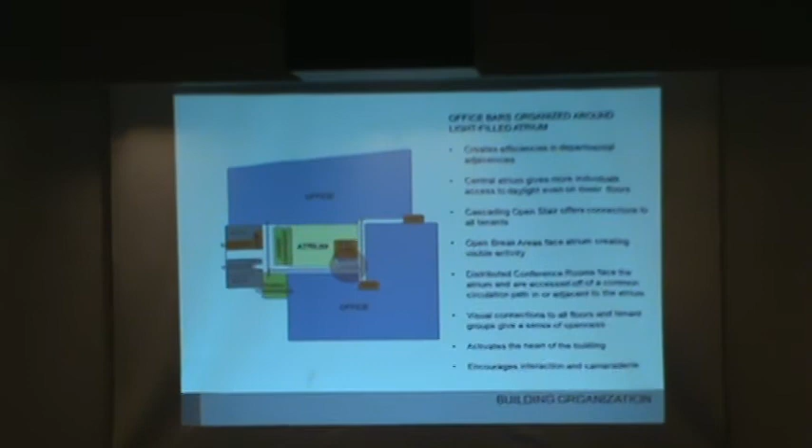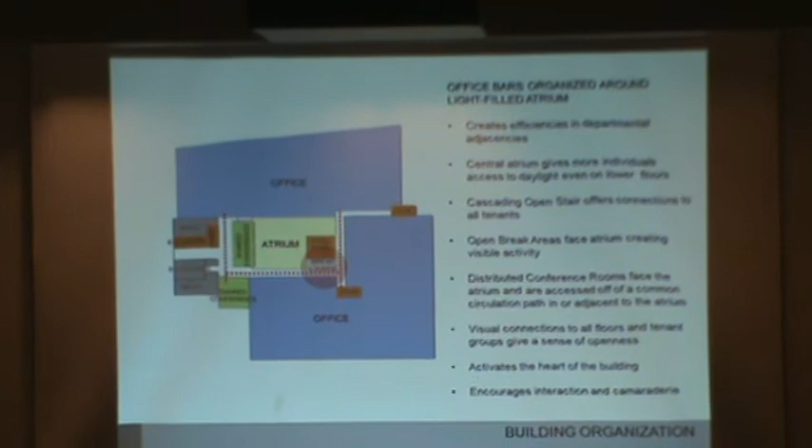We were given an extensive program. It was about 212,000 square feet with 3 different departments, mostly Washington State Patrol, Office of Financial Management, and legislative agencies. We knew right away we were going to have to carve away at this building, cut a hole in it to really create a dynamic workplace. By dynamic, we mean not only does this have a wow factor, like this is a fun place to come and work, but dynamic in that it's changing, it's flexible, it can adapt over time.

So what we've done here, you can see the basic building diagram. We have 2 bars of office indicated in blue. We carved away the middle of the building and put an atrium. The atrium not only brings light into the building, but it becomes a social hub for the building. You can see the red dashed lines here are the open walkways into the atrium. What we really did was take those common elements of the building and push them to the center of the building. All these elements are conference rooms.

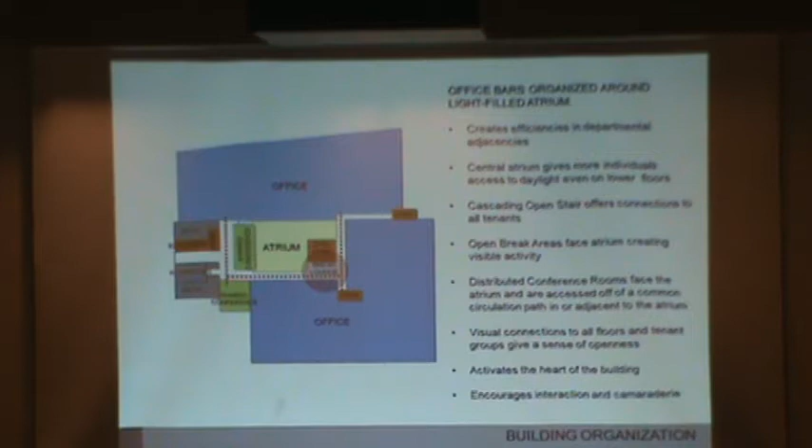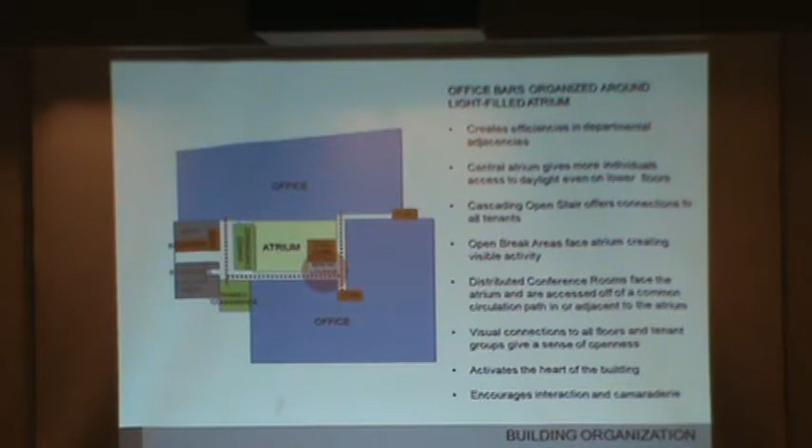We moved the lounge area into the space. Humans by nature are very social. The way we work today is much different than it was 20 years ago. So people are more social, have more meetings throughout the day. So what we've done is taken all of these common spaces and pushed those into the middle of the building. The result, of course, is that we make it a very interactive space, filled with light and activity, to increase and benefit the quality of life of the people living in that space.

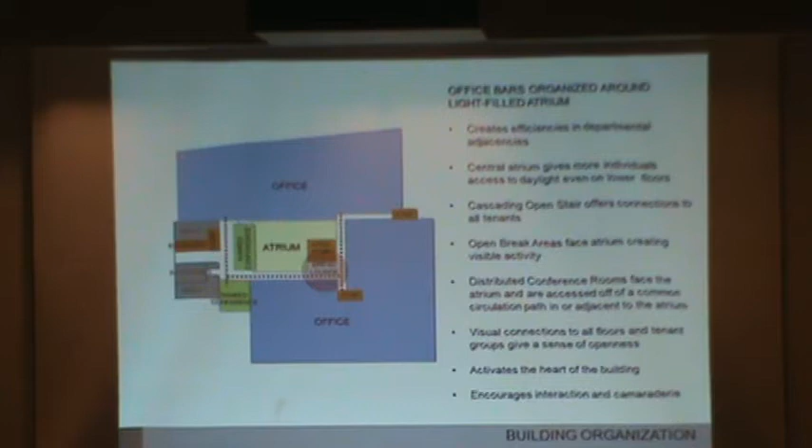Typically, a full block building, which this is, you end up with everybody fighting over, I want that window seat. What the atrium space does is really bring natural daylight into the space and make it a much better quality workspace for the majority of the building.

We're going to kind of stack through the building. This is the lower level. This building is actually kind of 5 stories on the north side. You can see what we've done here is the program for the lower level is mostly Washington State Patrol. There's 3 different departments down there. We have a secondary secure entrance to the building along Union Avenue there.

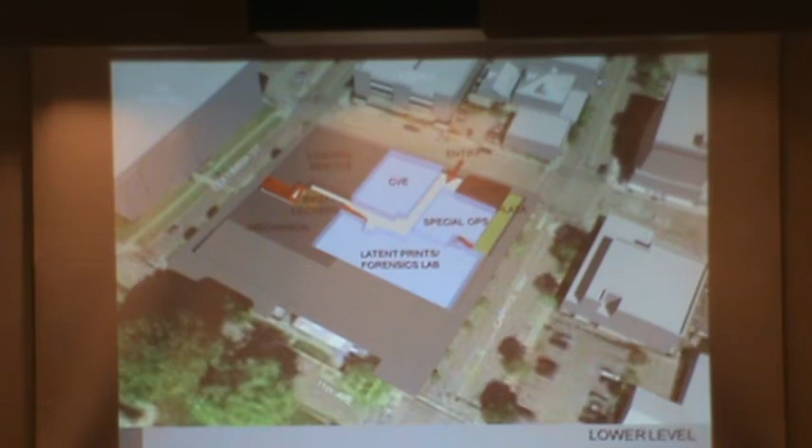Partly because people are going to be parking around on all sides of the building, but also to gesture back towards the city. We've also indicated a retail area. It may not be retail, but it's an opportunity to contribute back to Capitol Way. We also thought that could be a space for something like a tribute to fallen Washington State Patrol. But it's a flex space and opportunity to really have a front on the city. We'll talk a little bit about that when we get into the integration of the building into the site and how it relates to the city itself.

Moving up through the building, this is the primary level of the building. You can see on the southwest corner, facing the campus quad, we have our main entrance. The entrance is set back on 2 different sides. It's a double height entrance space leading directly into the lobby space. There's a security desk at this location, and connected to that is the first floor of the atrium. That's really meant to connect the outside and the inside.

Very welcoming space. The atrium would be filled with tables and chairs and stuff of that sort. We've actually also cut a hole in the atrium at that level, so the atrium actually connects all 5 floors of the building. If you do enter on that lower level, come up through the stairs, you would be in the center of the building.

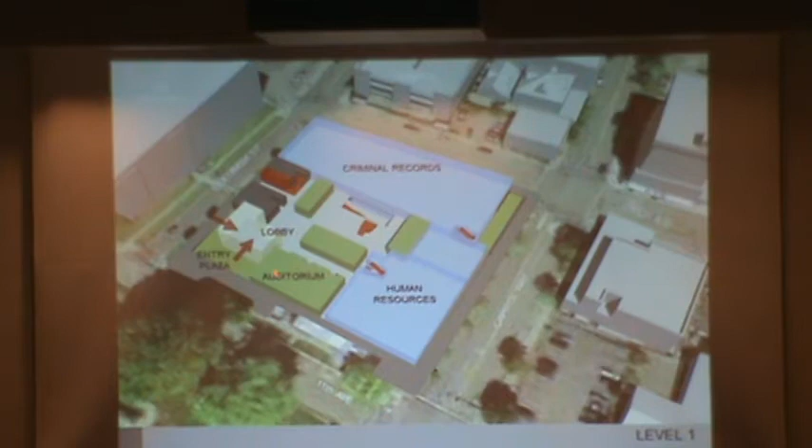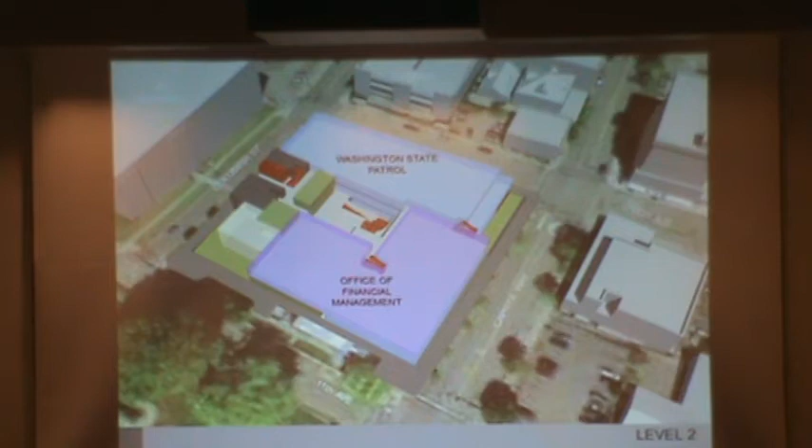Washington State Patrol has the criminal records and human resources departments on that level. The green areas are the common conference rooms for the building. Moving up the building, there's the Office of Financial Management, which is in the purple area here, and the Washington State Patrol areas. You can see the green areas are, again, those shared conference rooms. The idea was bringing all of those common spaces into a very central location in that heart, that hub of the building in the atrium.

Stacking up to the 3rd floor, you might notice that the atrium is actually getting wider as it goes up. That allows more daylight to come in, more access to it, but it also allows those open walkways facing out into the atrium to actually be connected to one another. You could look down and see people moving. The orange is vertical circulation.

We have an open stair connecting all of those floors, and at the tops and bottoms of the stairs is the open lounge area, which is basically a break area. What that does is really help connect all these departments and really become that social hub, that living room of the building.

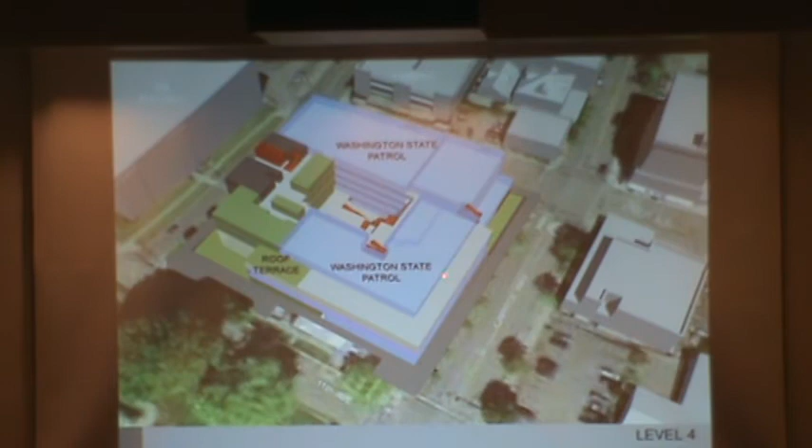Moving up to the 4th floor is all Washington State Patrol groups. I think there's 5 or 6 up here.

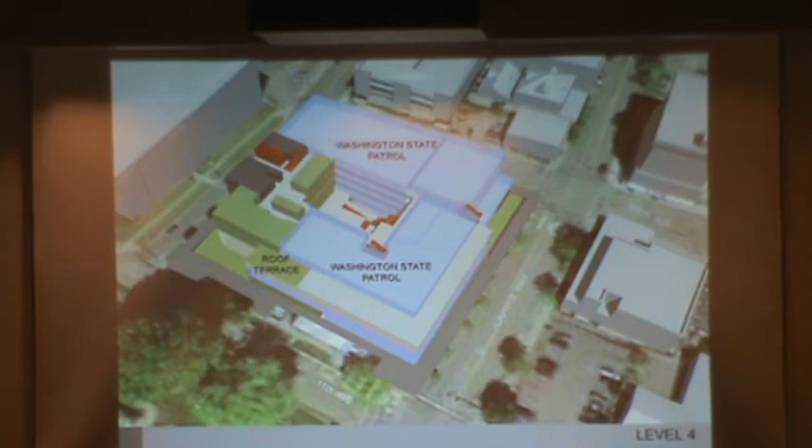We've actually set the building back on the south and east faces to create a roof terrace. This terrace looks back over the campus quad. It's south facing, so those 3 good months of weather we get here make it a nice space. The break area shifts from the atrium space to be on that roof terrace, so it is a common amenity for all 800 tenants. The roof actually projects over that roof deck area, so in those 9 months of rain like we get today, it will still be a usable space.

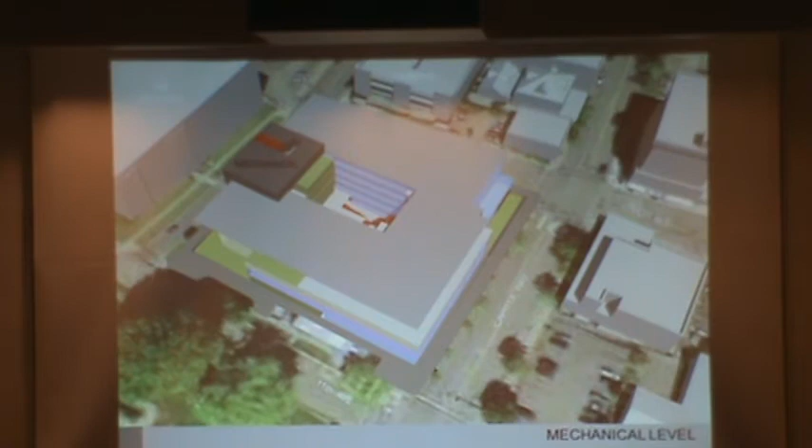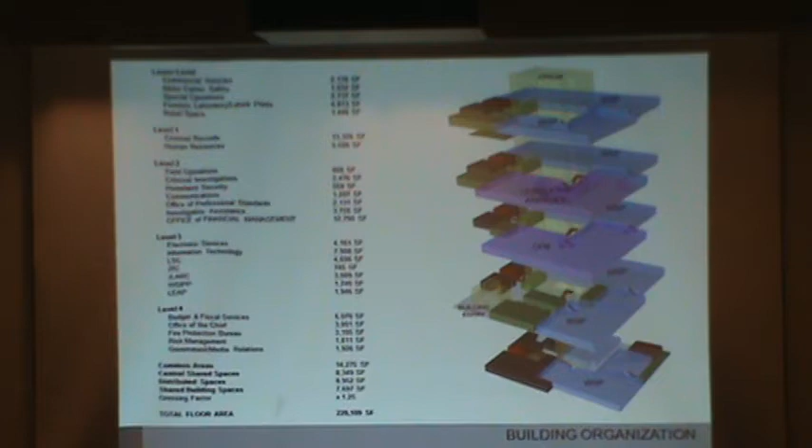We also worked really hard with McKinstry, the mechanical engineer on the team, to reduce how much rooftop mechanical we have. We wanted to use that as an opportunity to add PV to the project, a renewable energy source. You can see in the diagram on the right how the building stacks up, and the yellow area is the atrium. You can see how that connects all these departments, really becoming the living room and hub, the focal point of the building.

In addition to those spaces you saw in the atrium, I wanted to talk about the different types of interaction spaces throughout the building. Within the tenant spaces, we've held some areas off the windows to create wide spots in the corridor where people can get up from the desk. People meet a lot differently than they did 20 years ago in an office building.

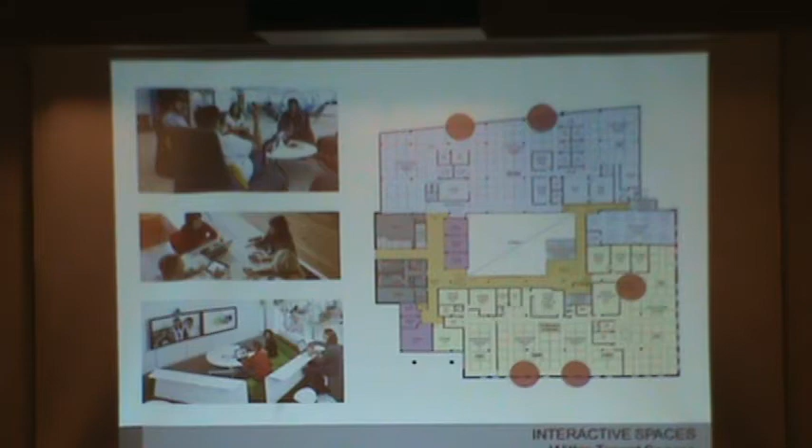It may just be person to person, or person to a team. We're creating a variety of these spaces. You can see here all the spaces available for the different tenants within the building, again pushed to that atrium space.

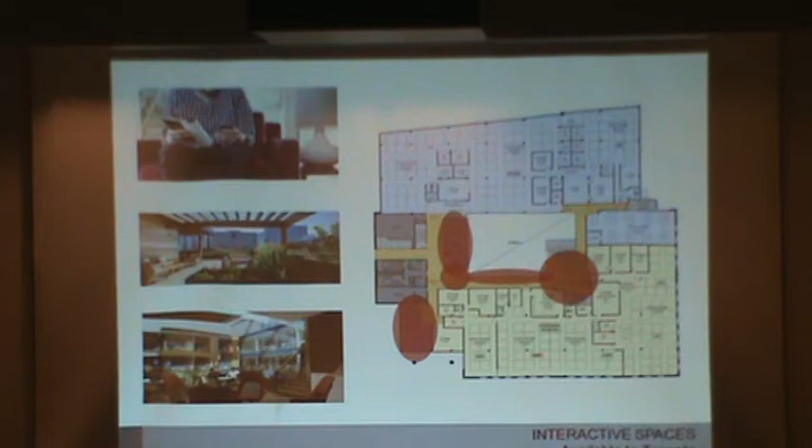The break area and lounge have wide spots in the corridor with a couple pairs of chairs and some tables, as well as pushing the conference rooms out there. These are available to all the tenants.

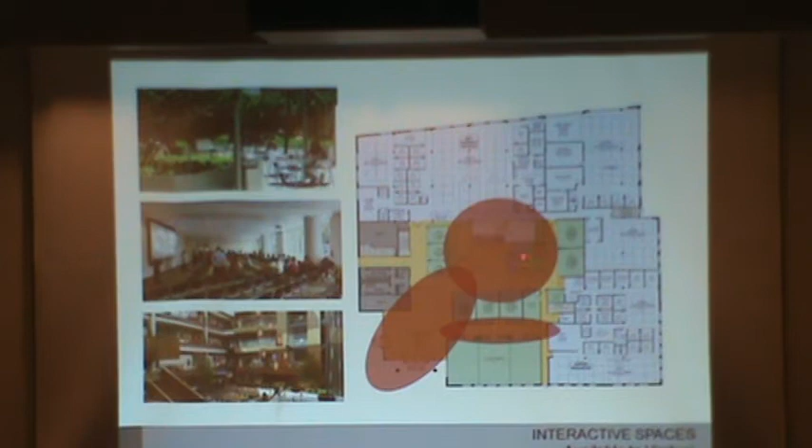The large area here is the main entrance to the building, with the security desk located here so security has visibility to anybody entering the building, and also to the foyer outside the auditorium space. The intent is that the atrium floor is available to everybody - you would check in and go through security.

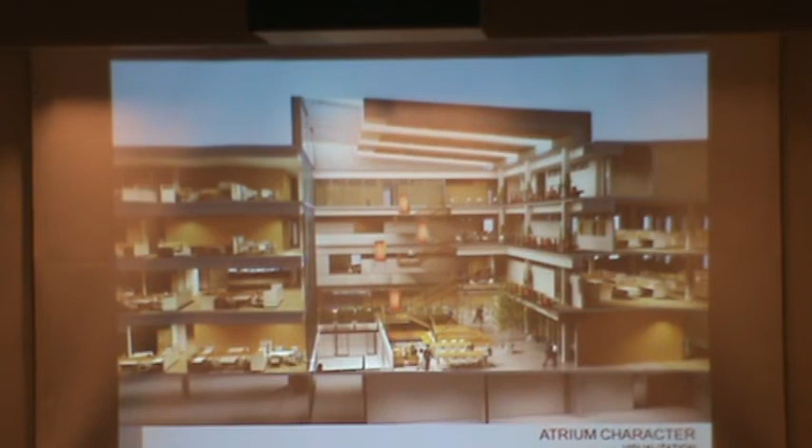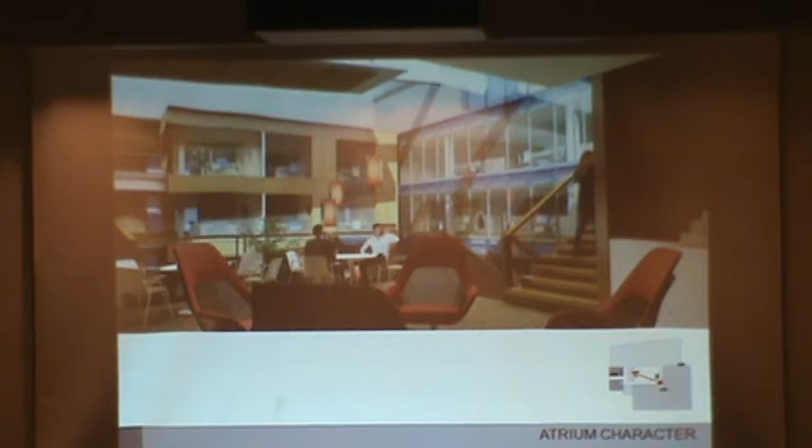This is a view from, I believe, the third floor open lounge. You can see the connecting stair going up to the fourth and down to the second, with lounge tables and informal meeting spaces. I thought it was very important that as those stairs cascade down, each of the landings is actually a wide collaborative area for meetings, so that flow of traffic and activity continues through the collaborative spaces and projects into the atrium space - so you're in that space.

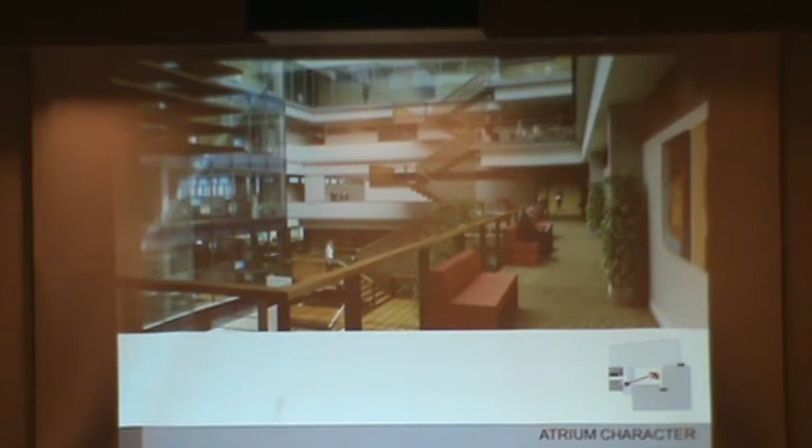You can see off to the left the cluster conference rooms that stack on every floor, easy to get to. Another view of the atrium space, looking back at those conference rooms - there are 3 on each floor, stacking all 4 floors.

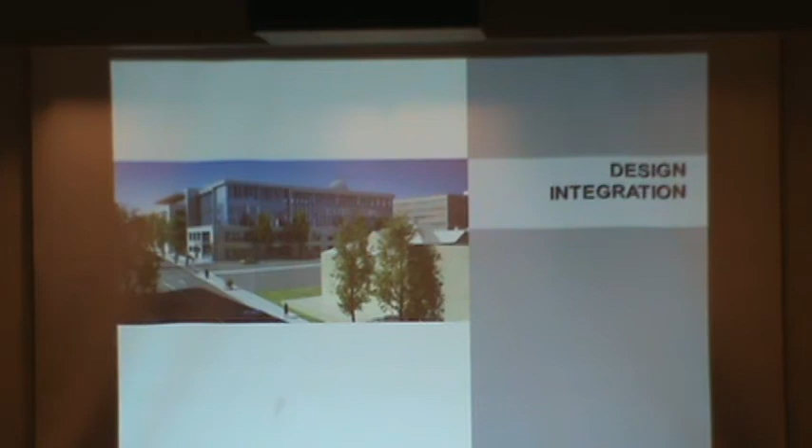We're going to talk a little bit about how this building fits into the context. As you know, our site is located at the edge of the historic campus, and it is facing downtown to the north. So the challenge is how do you create a building that works in the transition between two very different qualities and contexts - the very formal campus and the very informal city of Olympia.

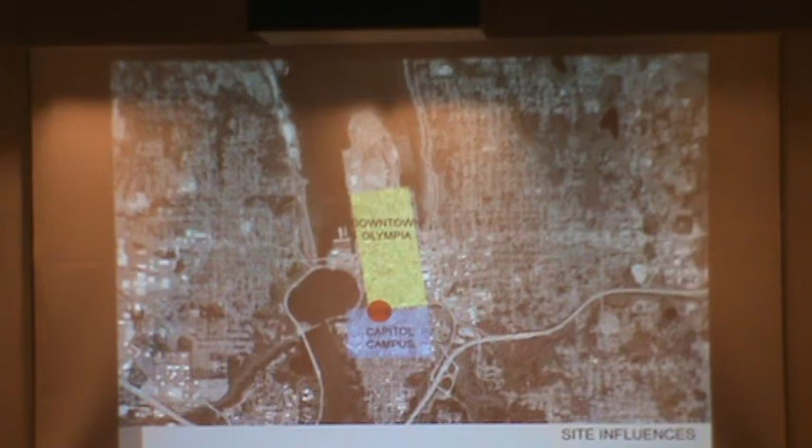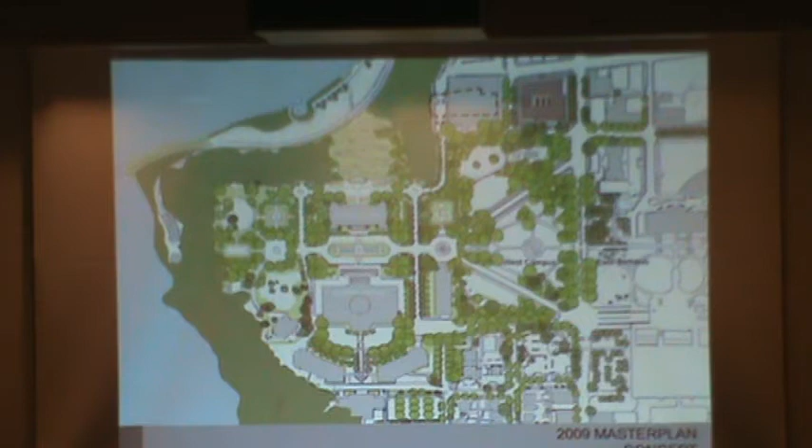So let's talk a little bit about integration into the site. What you see here is not what you see on campus now. This drawing is of the 2009 master plan for reintegrating the original Olmsted plan for the historic campus, and hopefully within the next couple of years that's going to be implemented. For our design, this is really what we needed to integrate into so our project would become part of the whole composition of the campus.

Part of the significant parts of the Olmsted plan are the surrounding street trees, which we are on that periphery, so those street trees would be continued around our building.

The other significant point of the Olmsted plan is that as you transition through the varying landscape elements - the surrounding street trees, the naturalistic outer campus area, and the more formal gardens around the buildings themselves - you have a series of very important transitional nodes. We've included that in our design too.

You can see the open public space at the southwest corner. That creates another transitional node as you come off the circulation path that's already there as part of the Olmsted plan, creating a transition point either between our building or hopefully whatever happens on the GA side, closing that loop as you exit the campus.

We've also added a secondary node at the city side. We talked earlier about the possibility of either retail space or a public interactive space at that corner. So that node at the corner of Union and Capitol Way would act as a transitional node as well. It all connects into the overall Olmsted master plan.

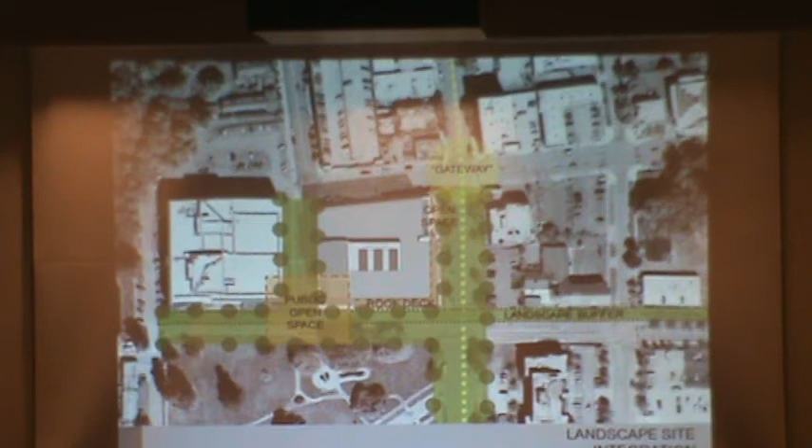Next slide. Landscape - you can see how the street trees are surrounding the building, and how in the southwest corner the transitory node focuses direction into the building from the circulation path. That will be strengthened through landscape elements such as stone benches and natural materials used throughout, connecting back to the home campus.

You can see in the landscape plan we go from a very large space to the open public plaza where our entrance is recessed. You can enter on two sides, go through a compression zone where the security desk is, and then pop back up into this 4-story meeting space.

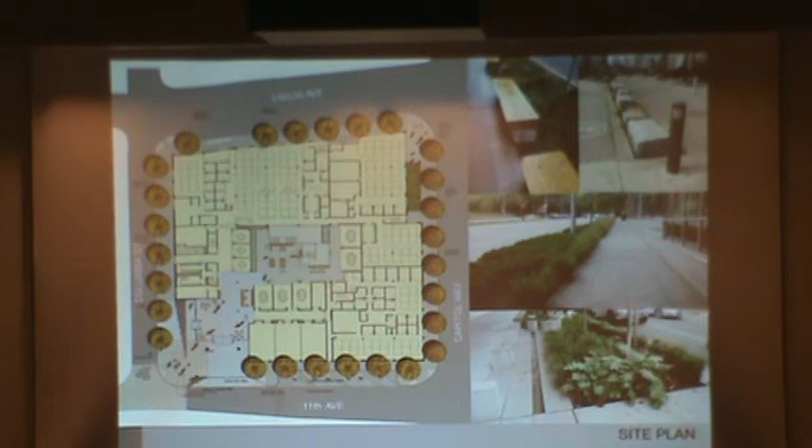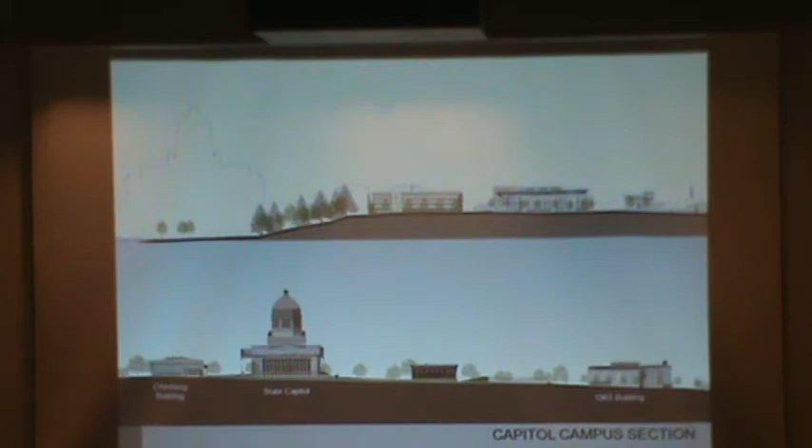Here you can see a couple of sections cut through the campus. You can see the scale of our building relative to the GA building at the top. Again, we're holding to that 59-foot height limit imposed on us, which really sets the datum for the supporting buildings of the campus. You can see in the bottom slide, the state capitol dome is in no way challenged by the height of our 59-foot building on the lower right.

Again, that formal limestone facade wraps around the building at the 3-story level, but then drops down as you get toward the city in relation to the 2-story buildings that surround the building on the Olympia side. It's really a transitional facade - you're changing the scale of Capitol Way.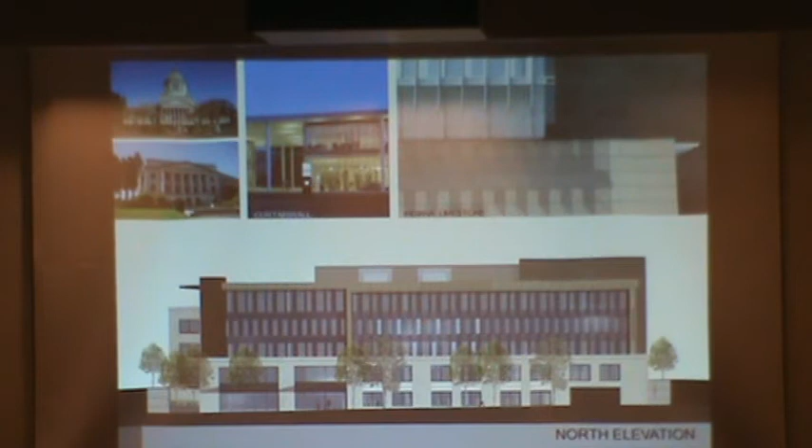As you move to the north side, we get a little bit more playful. We have a glass curtain wall system that gets more playful in the patterning. The scale changes, but we still maintain that stone base throughout the building, so as you walk around you still have that same sense of quality material of the stone of the campus. The building then steps back at the upper levels, really trying to reduce that wall between the city and the campus.

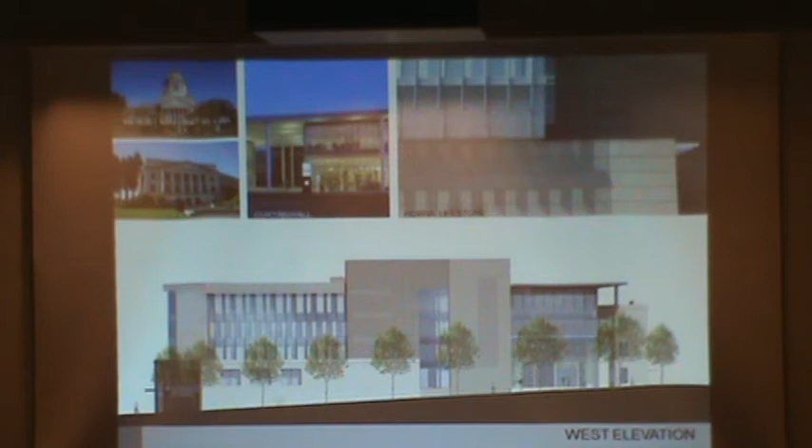The west elevation, you can again see how that's transitioning back. You can see the entrance to the building on that southwest corner. We've placed the building core, which is the mechanical rooms and elevators, things that don't have as much need for glazing. We're really using the building elements to help with the performance of the building. This side of the building gets a lot of afternoon sun, and by putting these elements here, we don't have to cool the building quite as much.

View from the north side, looking up Capitol Way. You can see the building with the dome in the background. You see that curtain wall system above, stepping back, becoming a much more lighter and transparent system.

Entrance to the building as seen from the campus quad. You see clearly defined entrance with the columns there. We have an animation for you, to give you a fly through of what the building looks like, and we're going to fly you into the atrium to give a sense of what that is as well. So this is heading north at Capitol Way.

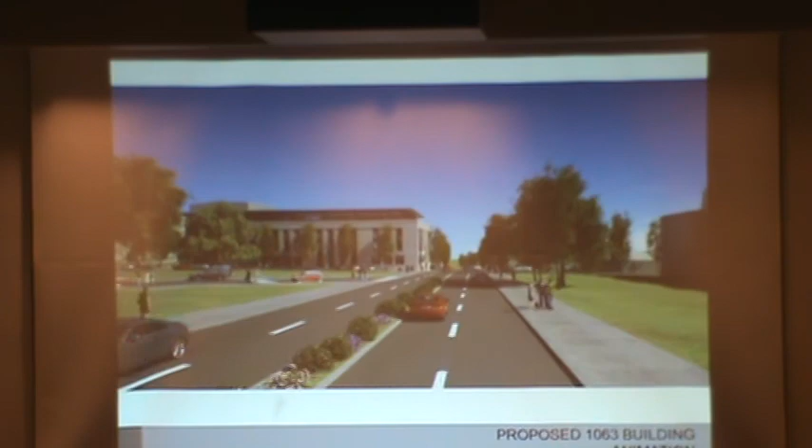Spinning around, you can see how the scale of the building changes a little bit, adapting to the influence of the city of Olympia.

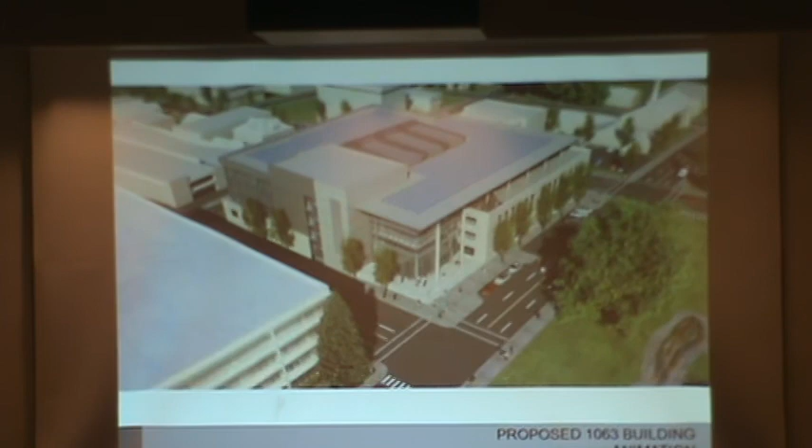You can see the fourth floor roof deck again, looking back onto the Capitol campus. Open public plaza and opportunities for public art.

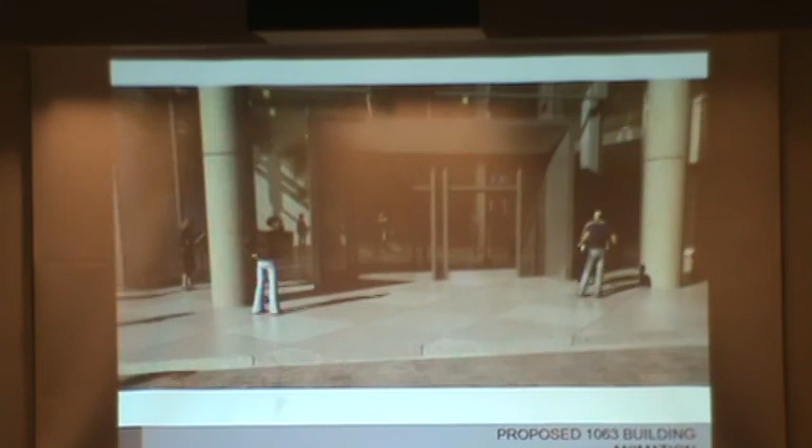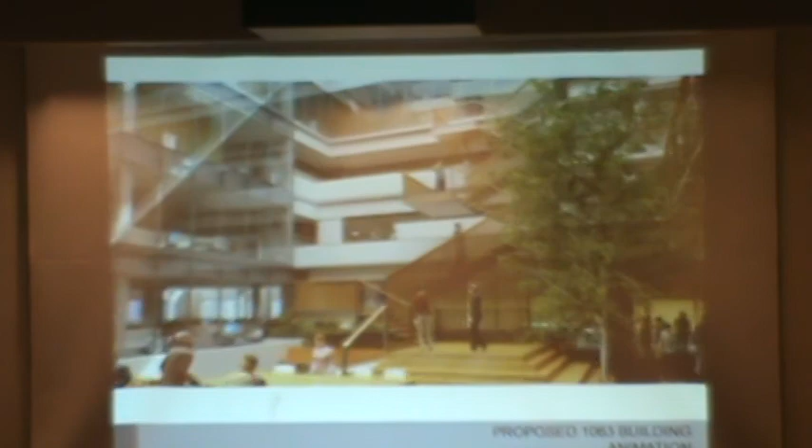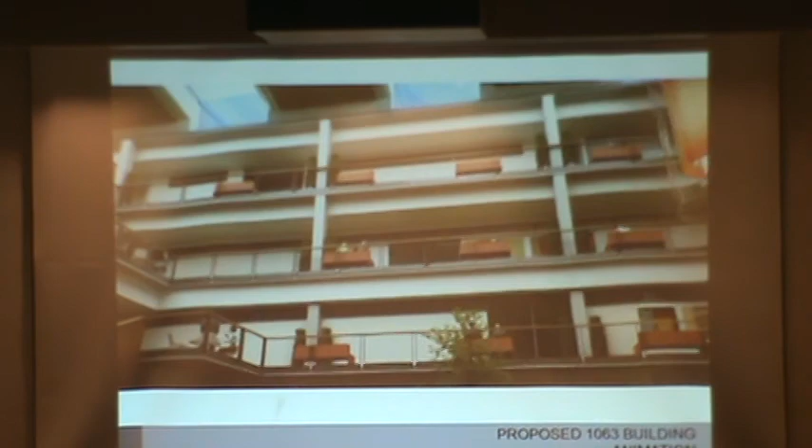You see the cascading connecting stair connecting all the floors. Again, lots of opportunities to come out into that space, to leave your desk. Not everybody wants to sit at their desk for 8 hours a day. Or 10 hours.

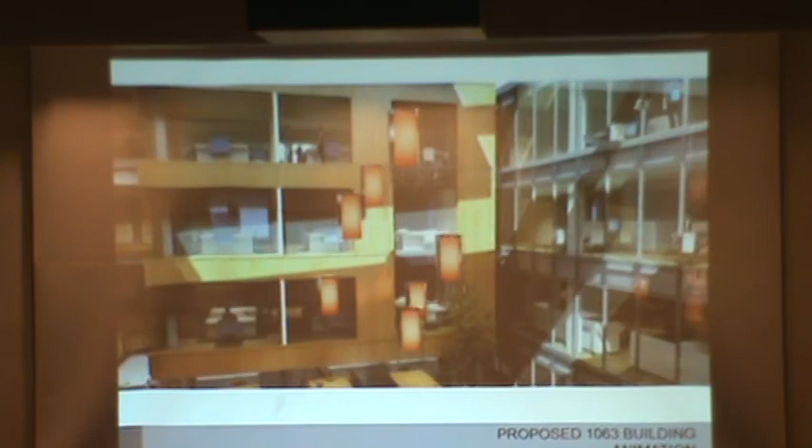Conference rooms facing out into the atrium space, ending in one of those break areas, conference stairs. So that's a little bit of a summary of the inside and the outside of the building.

And we have Mike from McKinstry going to talk to you a little bit about how this building performs. It's not only efficient and a beautiful building, but a very high-performing building as well.

Good evening. I'm Mike Lizzle with McKinstry Company, Vice President, and I'll be the project executive on this project. One of the things Lyle mentioned when he was talking about our firm is that we do both the mechanical and the electrical design in-house. That gave us a really great opportunity to try some exciting ideas out on this particular building.

One of the things we noticed right away was we had an interesting roof. So we said, let's build a mechanical system that's easy to maintain, understandable by the general public—there was a question here earlier about being able to maintain it. We're projecting this would be a modern overhead VAV system, high-performance chillers, high-performance air handlers, series fan power boxes, and that would make up about a third of the energy savings in the project.

The other thing we're going to do is put PV panels, photovoltaic panels, up on the roof. We did that because the design of the roof allowed us to easily place the panels and we had enough room. We have about 290 kW worth of electricity to be generated by these panels.

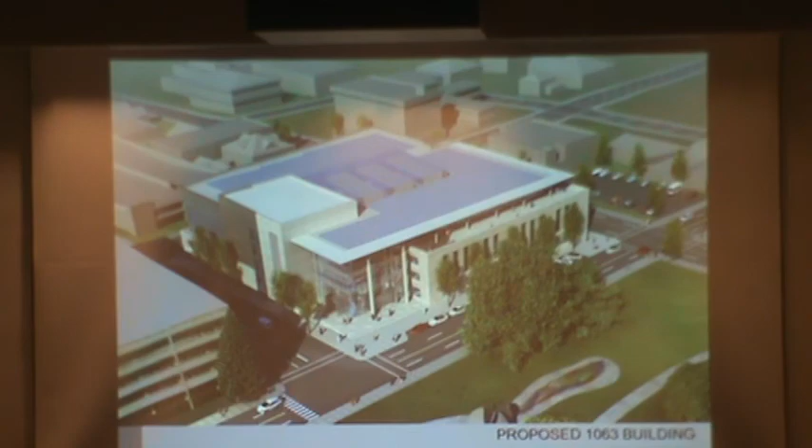There were 5 main points addressed in the RFP for this building as goals for the mechanical system. One was it had to achieve LEED gold, and we did that easily. We had to be 30% better than ASHRAE 90.1 - we beat that. We had to exceed ASHRAE standard 55 - that was achieved. We had to have an ENERGY STAR rating of 90 or better - we actually scored 100. And an EUI of 25 to 40, and we're actually at 25.

This is the amount of energy that the building is going to be using based on the square footage of the building, so it's one way to look at energy efficiency. The lower the energy units, the more efficient the building is. Today we see buildings in the 70s, 90s.

Part of our business today, our energy use, is to try to reduce the amount of energy used in the building. In fact, this building will be in the top 1% of office buildings in the United States if you pick this design. I'm pretty proud of that. So, met project targets in terms of energy.

I think it's a simple mechanical and electrical system to own, operate, and live in. We're going to be here for 5 years. We've got the energy guarantee on the building. We're going to make sure that all of these items we just listed are not only met, but better. And each year, we'll be scored on how well we did.

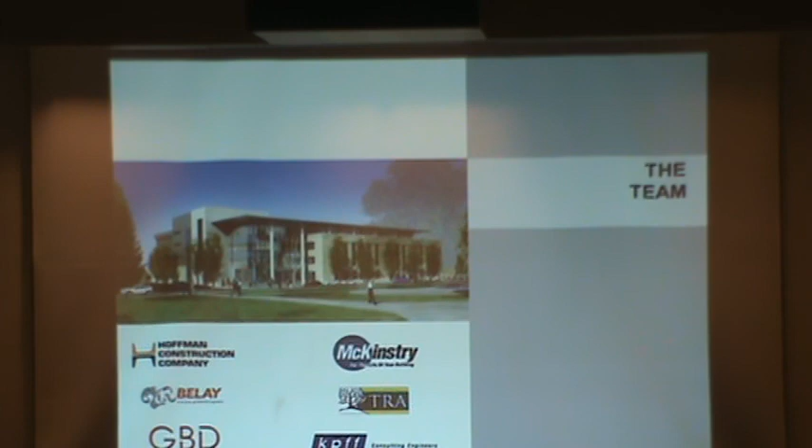I couldn't tell - what kind of interest is there on Capitol Way as far as windows and activity and that kind of stuff? Michael, can we go back to that slide?

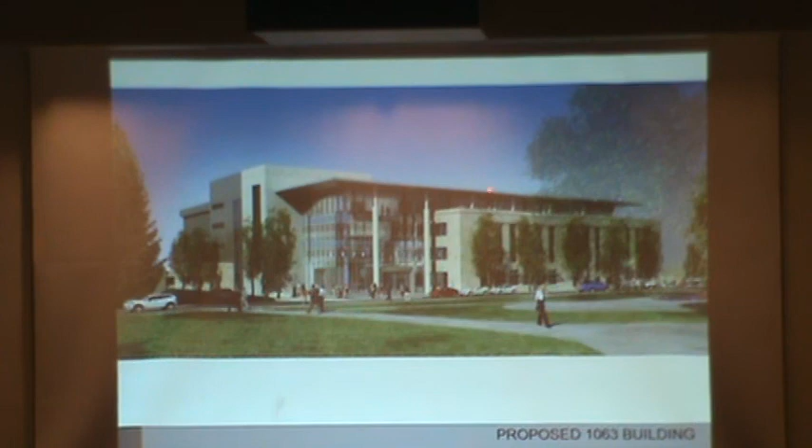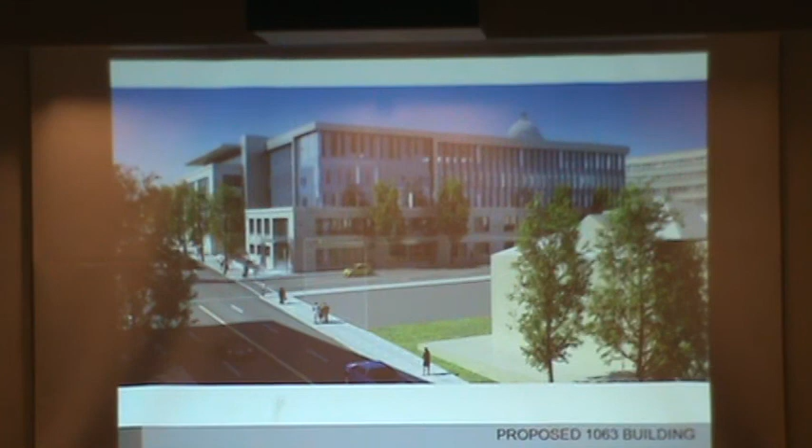So this is the entrance to the building here, off of 11th and the main campus quad. You can see we have smaller windows at the lower level, at the street level, and those, as the grade falls away - actually, go back to this slide - those windows follow as best they can, and then when you get down to where we have our lower level, we've actually pushed the building back, and there is a small plaza there that is occupied as well. This being a fairly narrow sidewalk and a busy street, we really did whatever we could to kind of limit and upgrade what that sidewalk experience was.

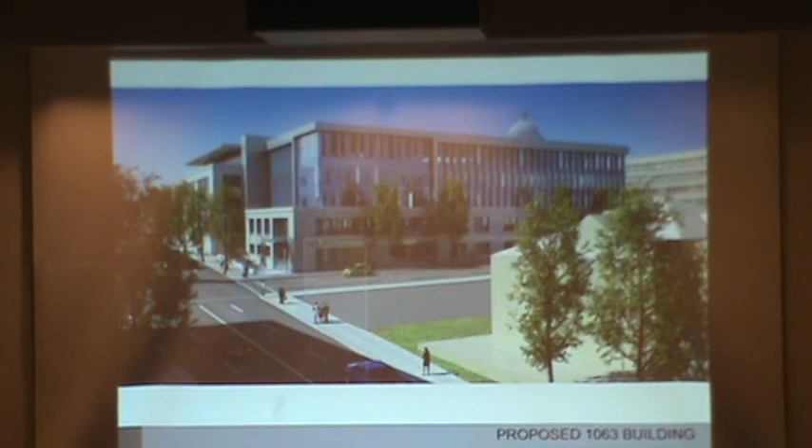Maintaining the existing street trees there as much as we could, and really creating a wide spot at this gateway. So the public focus towards Olympia is really at the corner of Union and Capitol Way. We have a small plaza, we have terrace gardens, we have public gathering space. On 11th, we have the main entrance because it more relates to the campus, and as part of that overall competition, we wanted that also part of the direction. You might have to answer that question.

I'm curious if you could just talk a little bit more about the parking along 11th in particular - we're not familiar with the requirements for that. There's not a lot of parking on the campus already. So with that, on 11th Avenue, right across from the Capitol campus, there's a whole row of new parking - I'd like you to talk a little bit about that.

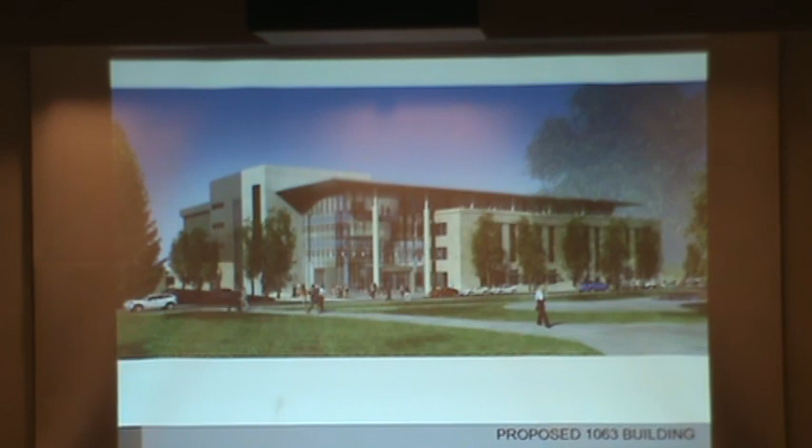That is actually solely accessible parking. That's all - it's just a row of accessible parking, and a drop-off area for the entrance to the building.